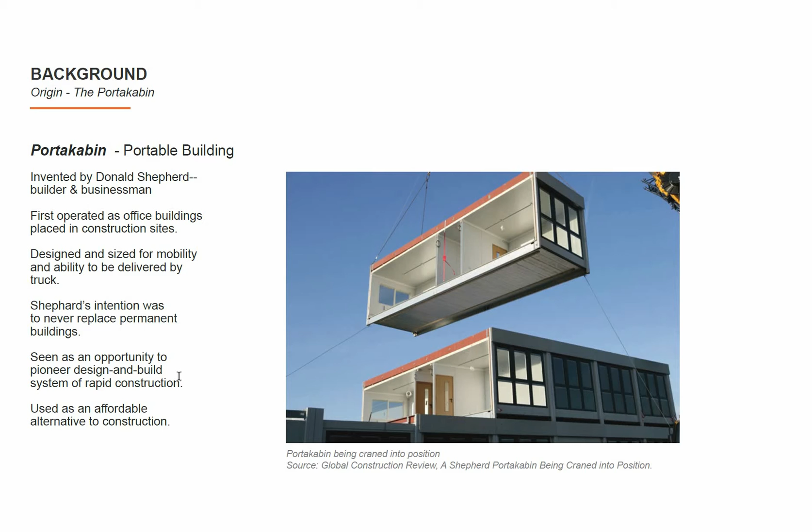For part 1 of the research, I'm going to explain the background, problems, and addressing issues. The original portable structure was called Portakabin. It was invented by Donald Shepherd for use as an office space in construction sites. They are defined by Robert Kronenburg as portable buildings, relocatable, and also demountable.

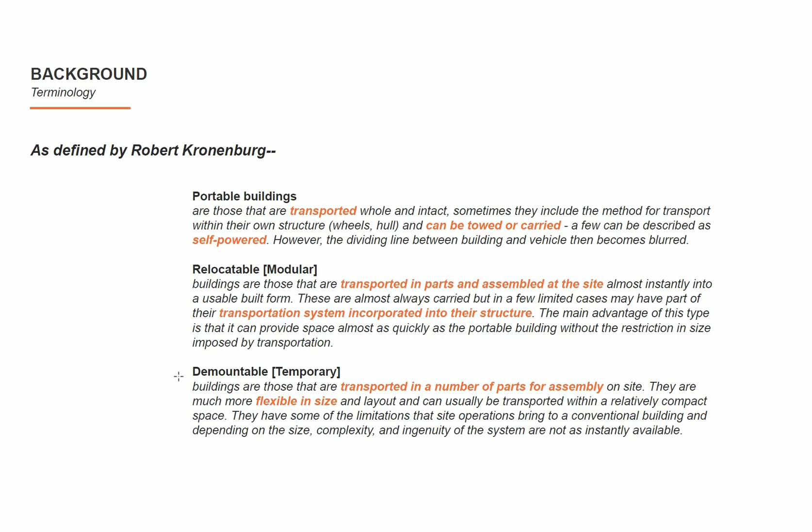The problem with portable structures today, they're not really portable. They're commonly used as permanent structures, which operate for more than 10 to 20 years. And one reason behind that is because of cost. Today, the DOE prioritizes their funding on repair and maintenance costs and the lack of funding.

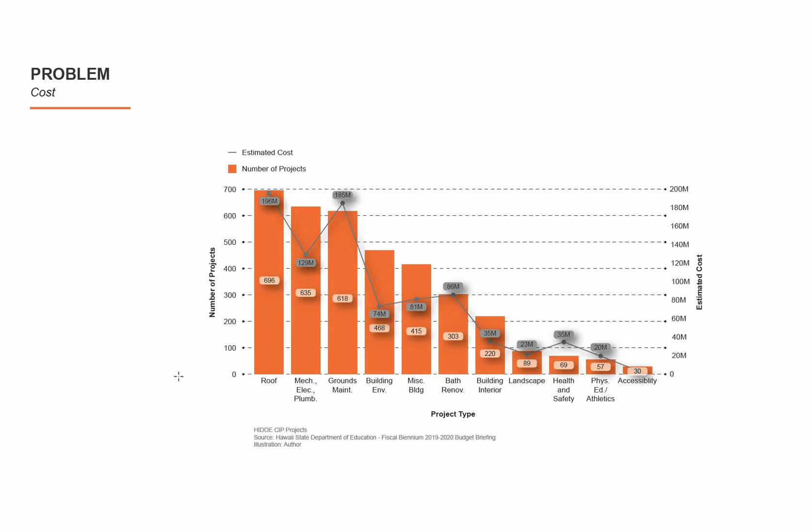And 3 of the addressing issues explained in this research are design efficiency, energy performance, and space utilization. So part 2 of this research investigates an inventory of portable classrooms around individual public high schools on Oahu, and also catalogs different portable types using qualitative and quantitative analysis. The methodology is collecting different sorts of data, more so finding the relationship between enrollment and portable structures growth in campuses. So the next few slides are going to be studies within each public high school campus.

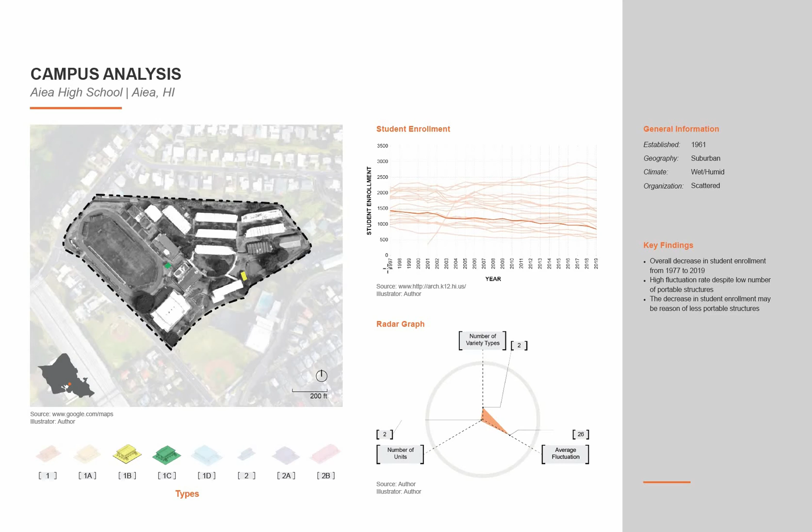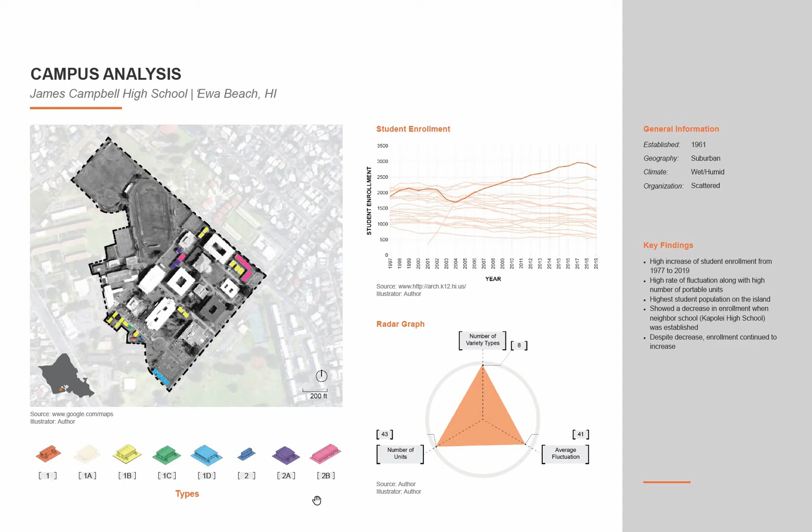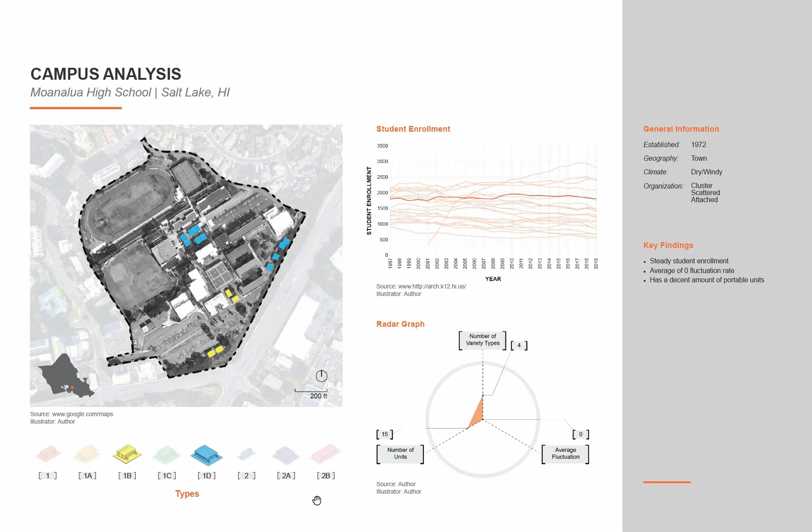So this is an example of a low population school. Here's a study of a highly populated school, James Campbell High School in Ewa Beach. You can see the relationship between the growth of student enrollment and the number of portable types, and also the number of units in total. So I'm going to skim through different campuses so you can see the relationship between student enrollment and the count of portable classrooms. You can find that low populated means less portable units, highly populated means more portable units, and the results summarize these findings, different relationships and observations.

The next set of research investigates different portable types, digging into the detailed parts of a portable classroom, finding similar characteristics, addressing issues to the design overall, and rating the qualitative analysis of portability, building envelope insulation, and passive design strategies, but also tying into the quantitative data of measuring the floor and roof surface area, the number of student seats for possible occupancy, and the window to wall ratio. So the methodology collects data between these numbers so that you can compare each portable type with one another.

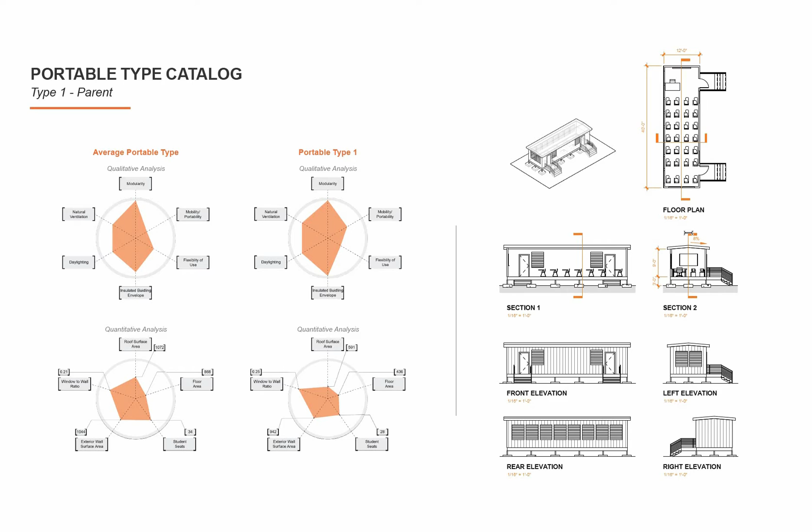And this is an example of the data collected for type 1, which is a single 12-foot by 40-foot classroom. You can see with this data how portable type 1 compares to the average portable type, and on the right shows the overall dimensions and physical characteristics of type 1. So I'm just going to zoom through these slides so you can see a comparison between each portable type study. And the results explain the strengths and weaknesses, and the overall findings of what an average portable type would be.

On average, they're very low in roof surface area and low in floor area, so it's not very efficient space usage. And in terms of qualitative analysis, they're not very portable, not very flexible, but they're average in ventilation, daylighting, and insulation. So that brings us into the design application of creating 3 new prototypes, and we're introducing a new term called additional classroom unit.

To explore 3 different prototypes, the research looks at 3 different scenarios where type 1 shows a temporary portable structure, type 2 shows a short-term demountable, and type 3 shows a permanent structure. The design goal for type 1 is to be solely temporary and flexible use, but also designed for transportation between different campuses. These are the project brief, adding restrictions to the interior needs, exterior needs, structural, and site needs.

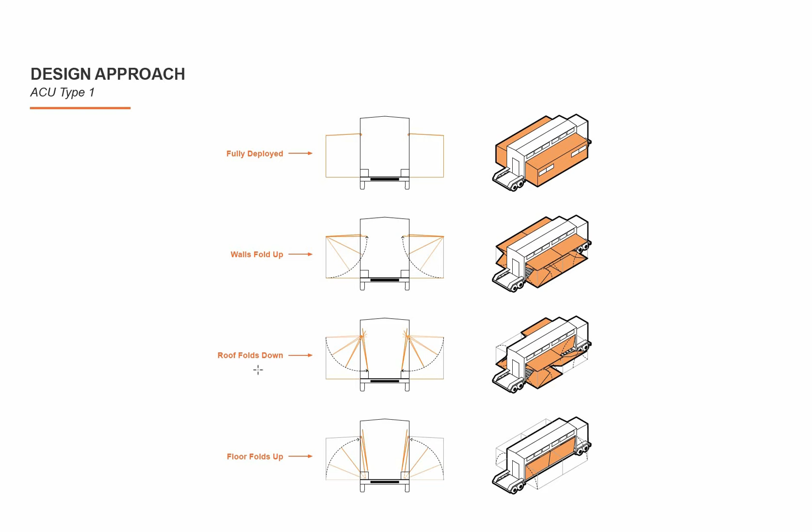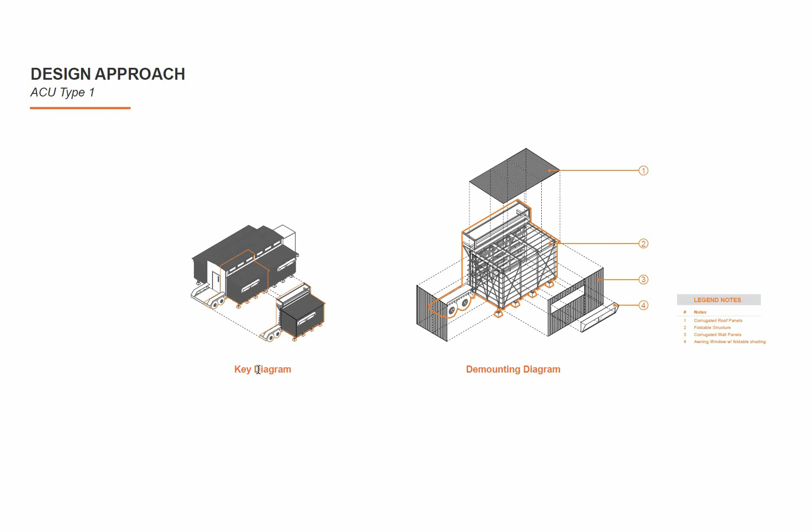The concept is to create a very deployable structure that can fold in for transport, but also fold out for occupants' functional use. And in order for that to be possible, the exterior finishes have to be demountable so that the structure can fold as a whole, and the demountable parts can be panelized so they can be stored inside the structure while it's being transported.

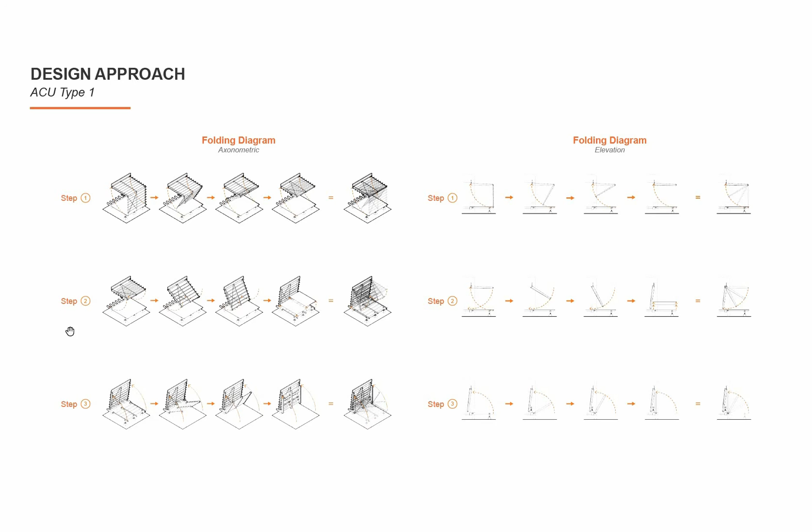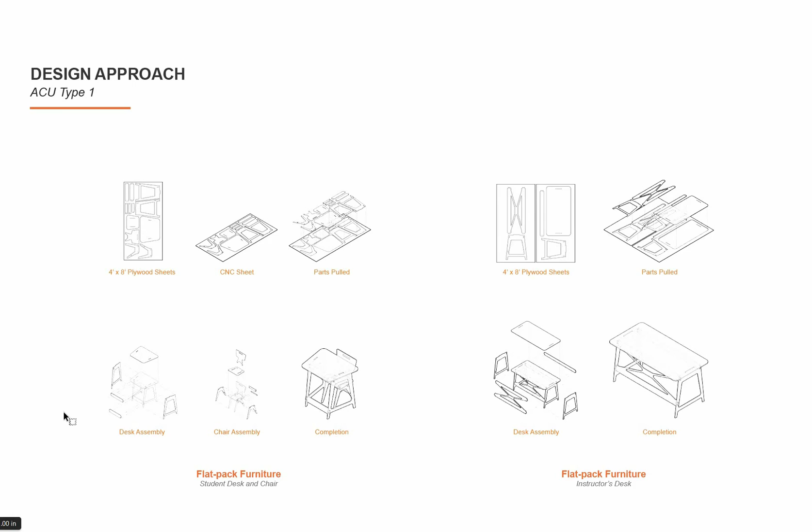So this is a more detailed step of the folding diagrams, divided into 3 steps: folding the walls in first in step 1, folding the roof in step 2, and folding the floor in step 3. And to stick with the concept, applying flat pack furniture that can easily be assembled but also disassembled for storage. Each piece of furniture can fit on a single 4x8 foot plywood sheet, and this is a diagram of how those components can be stacked and stored inside the overall structure while it's being transported. The space will be utilized as an open space, spacing out the student desks generously so that there's circulation around.

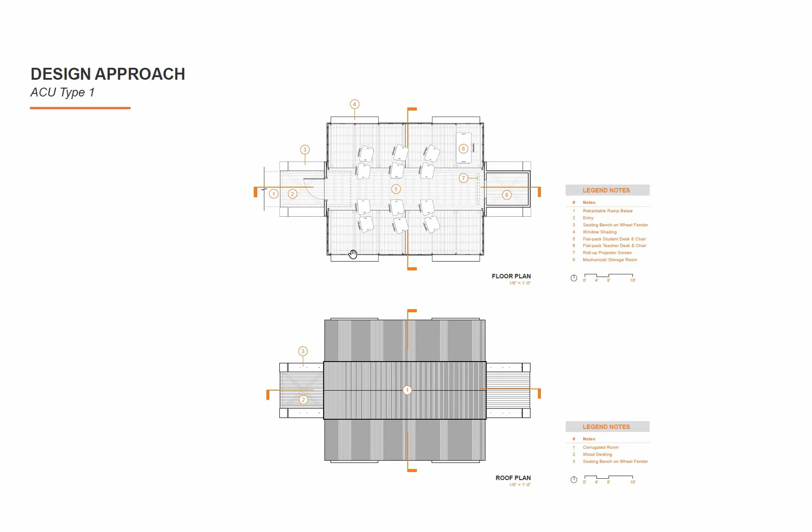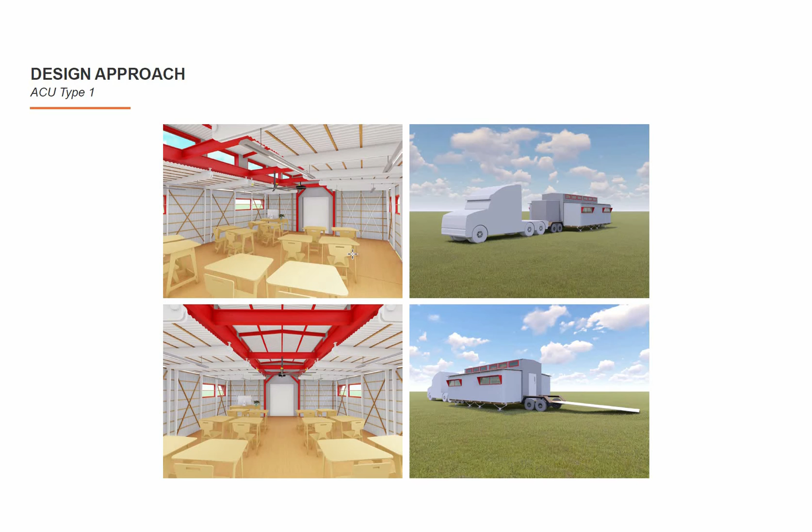The next ACU type is a short-term demountable structure, and goal 1 is to design for a demountable structure for short-term use, which could last about 2 to 7 years, but also designing for modular parts and rapid constructability. And so these are the needs that are laid out for the overall structure itself. Some of the key things are constructability, but also modularity, and thinking about the logistics of designing a system that can create a whole building system as a whole.

So that concept came from designing the smaller components first, so making everything all modular in 4x8 components, and thinking about the overall system as a kit of parts, but also thinking about flexibility and different choices. So opportunities where you can apply windows, doors, and screens, but also having a base wall as well.

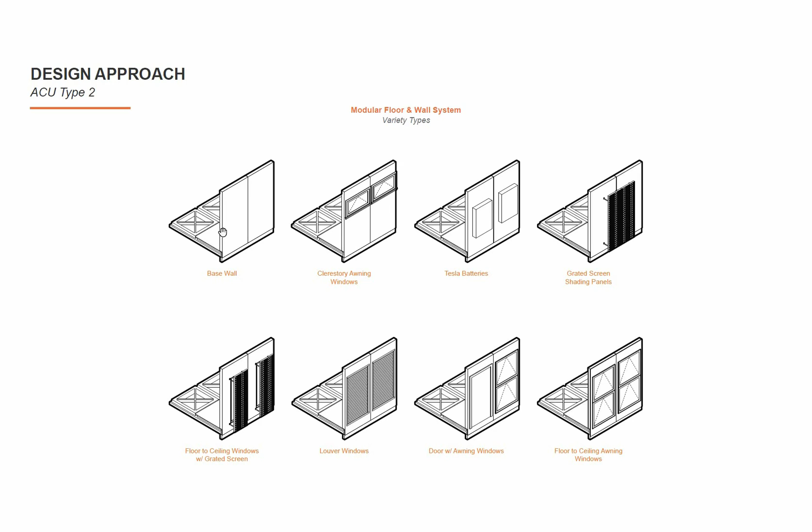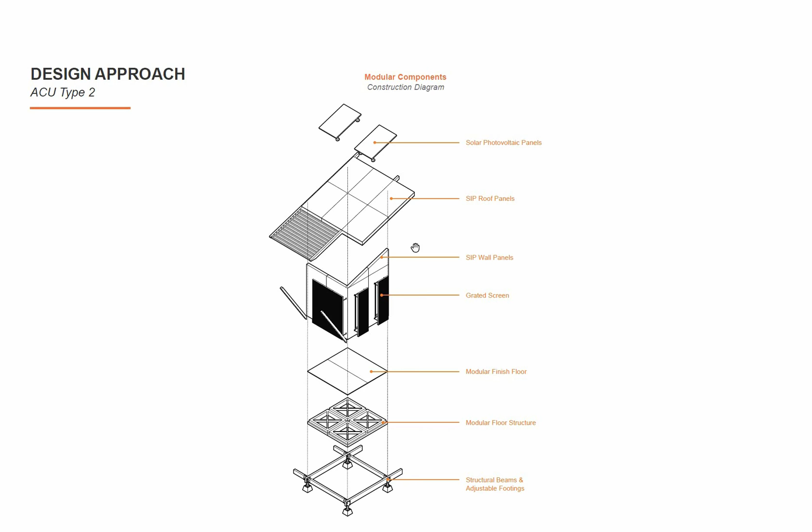And this is an example of how the building is going to be structured as a whole, starting from the structural beams to the floor system to the wall and then to the roof, and then stacking the components so that you can easily store it into an 8-foot wide container.

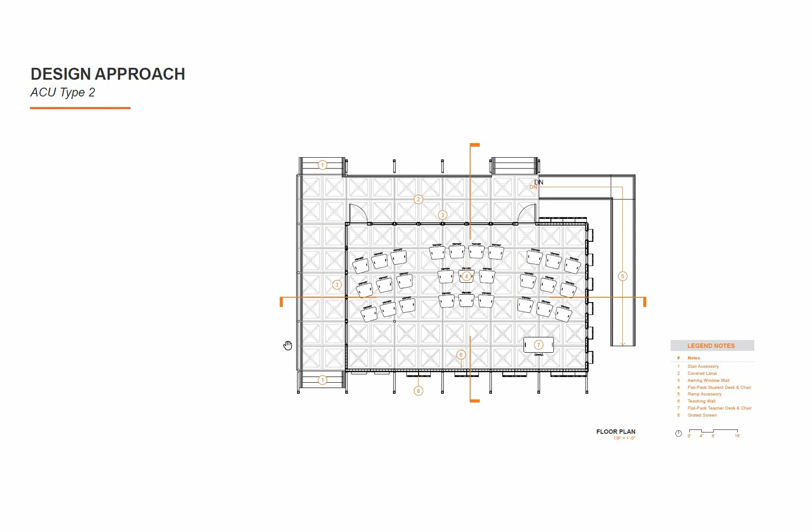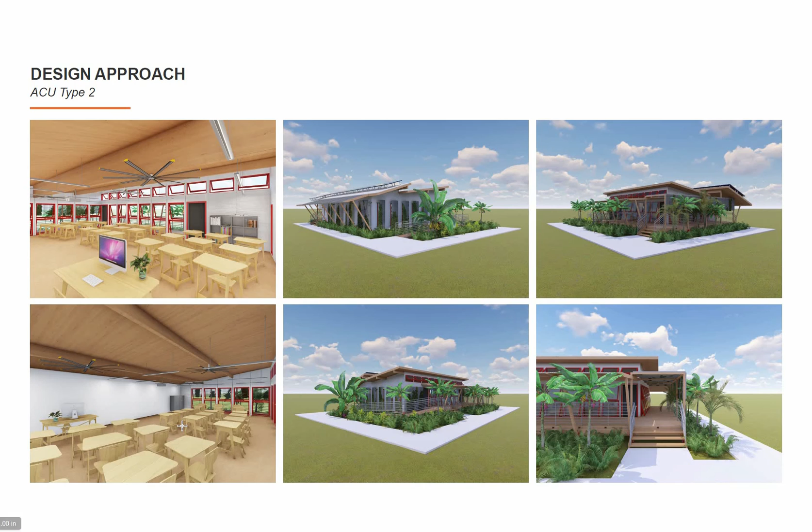ACU Type 3 is designed for permanent long-term use, so 7+ years, and also designed for innovative and rapid constructability. Some of the needs are applying a permanent foundation, and also designing something that can easily be built so that you can install buildings during the summer in a 2-month span, but also thinking about durability and long-term use. So similar to Type 2, but more improvements in thinking about flexibility.

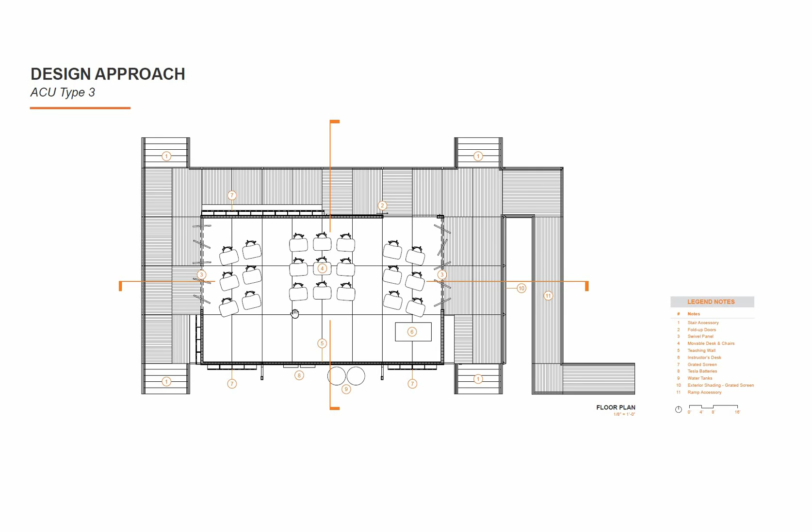So applying opportunities where you can use these swivel panels for writing surfaces, so you can create a collaborative space between indoor and outdoor spaces, but also creating more spaces outside where students can gather and wait for classes to begin or end, but having that overall feel of flexibility. So using movable furniture for students to create their own classroom layout.

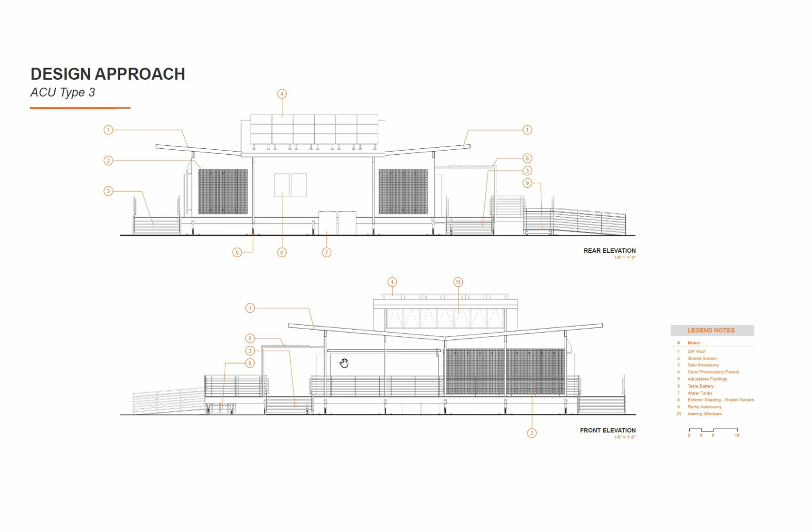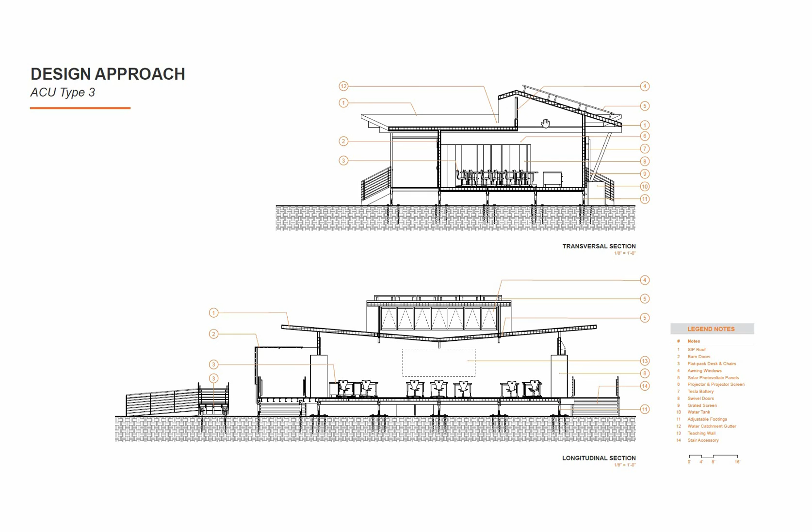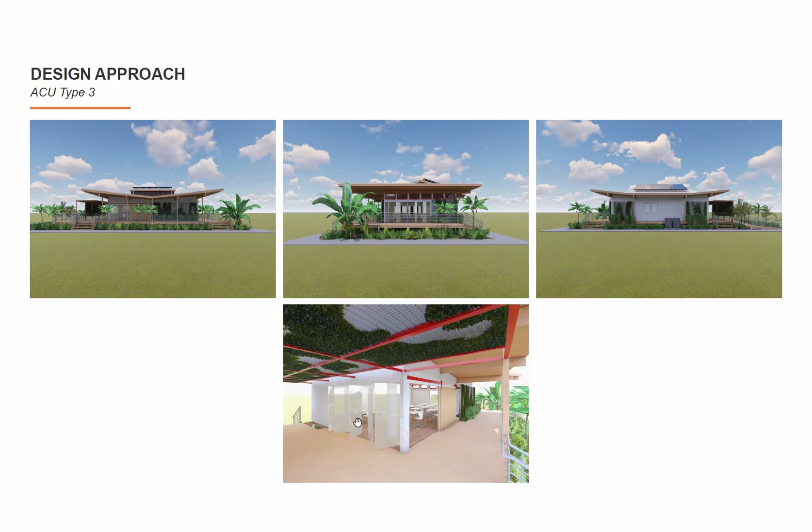And then the roof is designed as a butterfly roof, so the slope goes inwards to collect rainwater, and then a roof to generate more energy. So these are the elevations of the building, showing the butterfly roof and different textures of the exterior. And in the section you can see that we have a clerestory window to allow daylight to come in, but also allowing hot air to come out. So the interior view showing the movable furniture, and then the exterior view showing the overall feel and atmosphere of the space. So you can see over here the swivel panels, which can be applied as a writable surface.

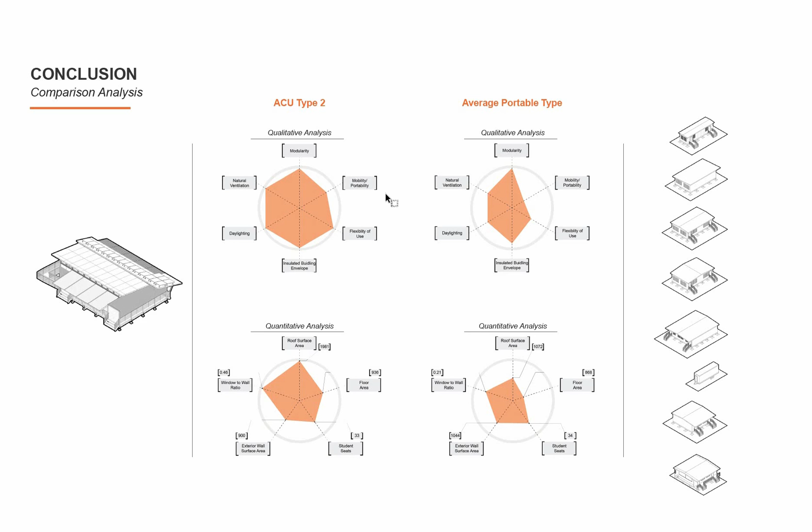So in conclusion, if I was to apply further studies, I would definitely look more into, especially for type 1, the structural or folding mechanism, try to get it value engineered to see if it's a feasible concept, but also running simulations and charting the daylighting numbers and also ventilation strategies. Type 2, bringing the overall concept into a physical mock-up to see how each component of parts would be constructed together.

And then type 3, having similar iterations of physical mock-ups of construction, but overall applying user inputs for design, and having the chance to interview students and teachers on the overall user experience, and also applying a cost analysis to see what the long-term benefits are of creating passive design strategies or more effective mechanical systems. How is that going to benefit a school that would apply these ACU types on their campus?

And also getting feedback from community design charrettes, just to hear from the public, and also site opportunities, since these units were designed as one-size-fits-all, and every site in Hawaii especially is different in climate, so figuring out a way to adapt these base structures into a more fitting site environment would further improve the research.